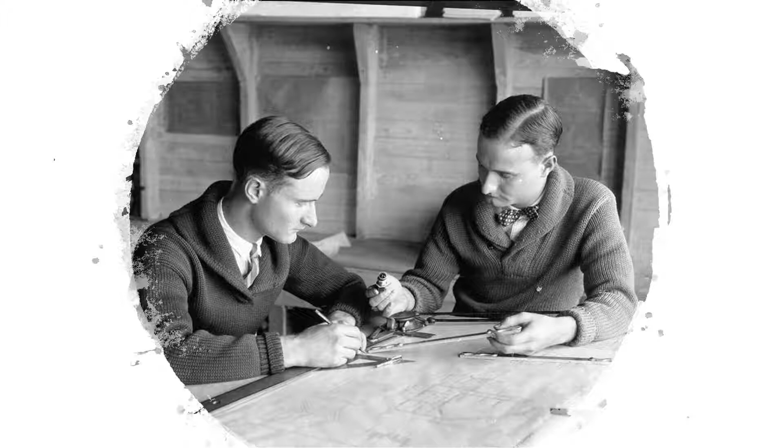I've been around technology and the transportation industry for quite a long time, not as long as these two guys in this picture, but I've seen technology make a lot of changes since the late 80s. Not only has the technology changed, but the makeup of our engineering teams has changed as well. But one thing that has not changed in the past 75 years is this need for collaboration. Whether you're building a road, a bridge, a Walmart, or as I am right now, building a house, we have to collaborate with one another.

We need to exchange ideas. We need to ask and answer questions. We need to share information with one another.

Now, CAD and design applications in general have done a lot over the years to facilitate collaboration. Let me give you a couple of examples. Let's take reference files, just the ability for different disciplines to work in different files and then reference those together to see how our data fits, whether something is out of place, whether something can actually be built. That functionality is incredibly conducive to collaboration.

OpenRoads has taken that a little bit further with the ability to partition data. For example, you've got a 10-mile corridor and you want to break that up into 2-mile sections, letting Team 1 work on Section A, Team 2 on Section B, and so on. Then, of course, you can reference those all together, cut cross sections, do your visualization, run your quantities. Again, highly conducive to collaboration.

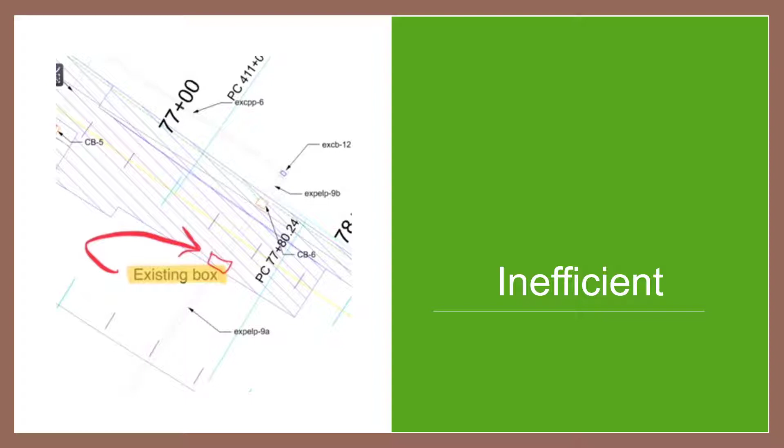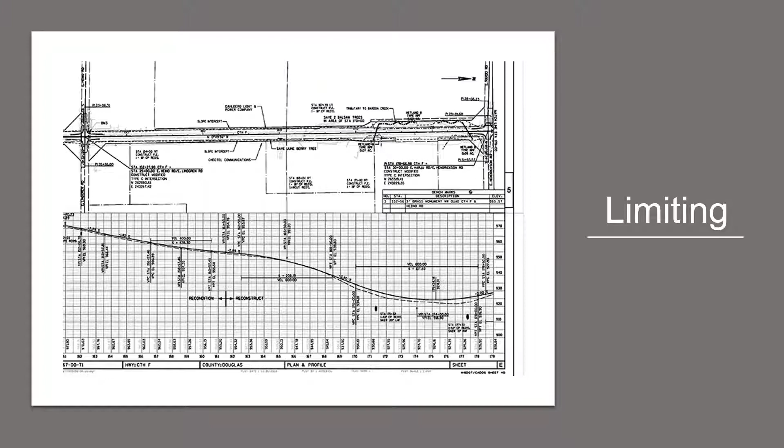Now, we all know this tends to be fairly problematic, and there are some pain points. For example, it's inefficient. The idea that I've got all this data at my hands and I have to create plan sheets just for review purposes is inefficient. At the same time, it's very limiting. When I create a plan sheet or a cross section, it's a snapshot in time. If I'm missing a piece of information, there's nothing I can do - I have to go back to the digital information. So it's very limiting, and of course, it's prone to error.

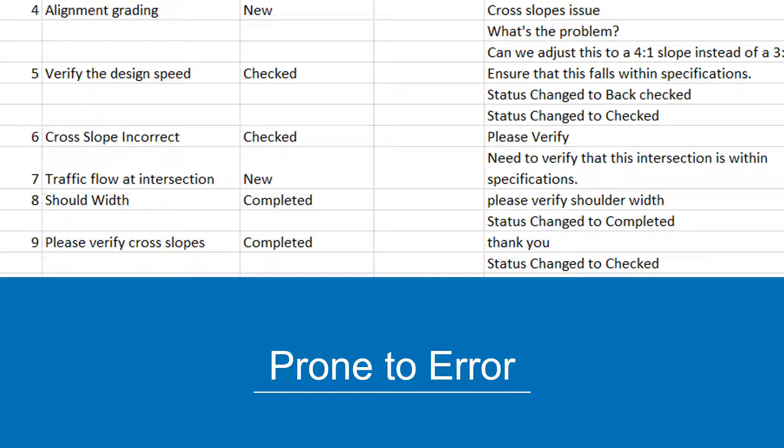Do things get followed up on? If I have an issue, was that issue emailed? Did that person take care of that issue? If I modified a profile, did all the appropriate teams and disciplines get notified correctly? So again, a lot of issues there.

So we haven't made a whole lot of progress, and there's different reasons for why. Part of it is just because it's what we've always done, and change is of course hard. But there are legitimate issues.

For example, let's say I'm a reviewer. I may not be familiar with your project, where it is, or how it's broken up or federated. So without paper, how do I find the right information? How do I know the information I have is the latest and greatest? You may be asking me to do a digital review, but I may not be a skilled CAD user - how am I going to do that? At the end of the day, I've got a lot of questions about, okay, without paper, how do we collaborate?

Well, the way we're going to solve this problem is the way we solve all problems when it comes to technology - we're going to innovate. On the Bentley side, what we're innovating with is the use of something we call an iTwin. Now, an iTwin by definition is a digital representation of a physical asset, a process, or a system. And to put it simply, for us, it's really a representation of our project.

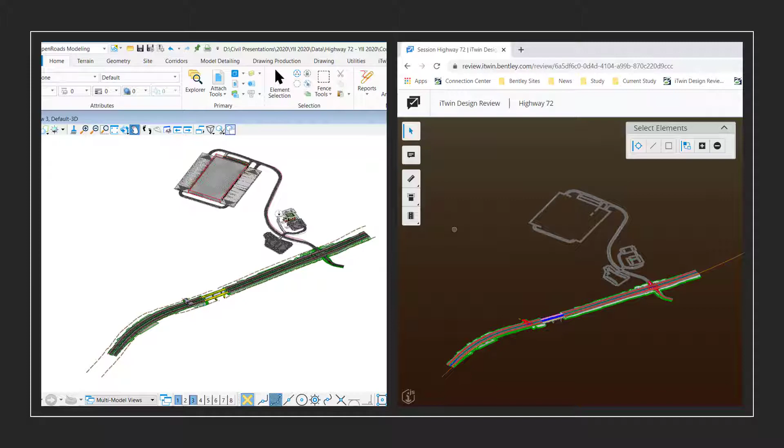I've got utilities, drainage, a site design, and 2 bridges. That's in OpenRoads Designer. Over on the right is my digital twin, or iTwin. Everything there is what I need, but it's not my original data—it's what's called an iTwin.

Let's take a look at how this use of the iTwin would work in a design review process. There are 2 workflows we're going to look at: one called an ad hoc workflow, and the other called a digital twin workflow. There are a few things I want to point out about the ad hoc workflow, and we'll go through each one individually.

It's cloud-based. It provides a quick review of a design work in progress. You can do it from a browser or from inside your design application. You can work in a 2D environment, a 3D environment, or a combination of both. And it's purpose-built for doing the types of reviews you need to do. Let's take a look at these individually.

Let's start with the fact that it's cloud-based. Why is that important? Because we need our information to be available to anyone at any time. We may not all be in the same office. We may not be in the same city or the same country. We need this data accessible to all of us.

Let's take a look at how this works. Here I am in my connection center, and I've got a series of connected projects that I am a member of. I'm going to select this Highway 72, which is my project. There are all my team members from my organization, but notice I can also invite people from external organizations. So we don't all have to be within the same company or the same agency. Now, within this connected project, I have something called iModels or iTwins that I've created.

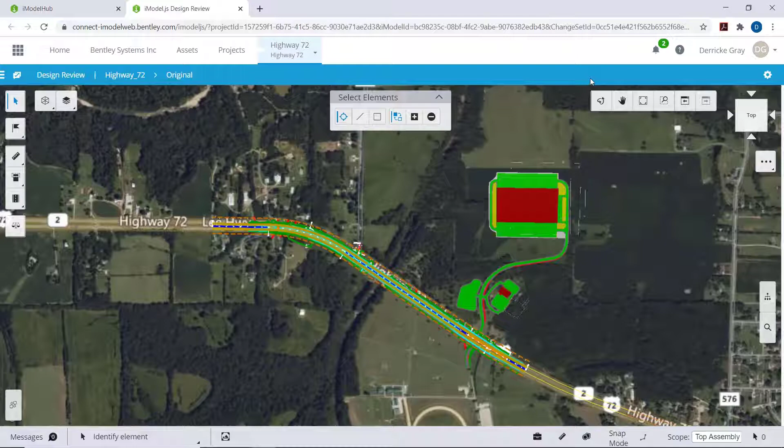I'm going to pop in here and take a look at one of them very quickly. But the point is that this is available to everybody. It's in the cloud, it's web-based. I can always know I've got the latest version, and everybody has access to this iTwin or this particular iModel. Now, what is this ad hoc workflow set up for?

If I need to do a quick review of a design work in progress, I don't want to have to go out and produce plans or produce artifacts of any kind, to be quite honest. I just want to be able to initiate reviews directly from my design application. And this is exactly what we can do.

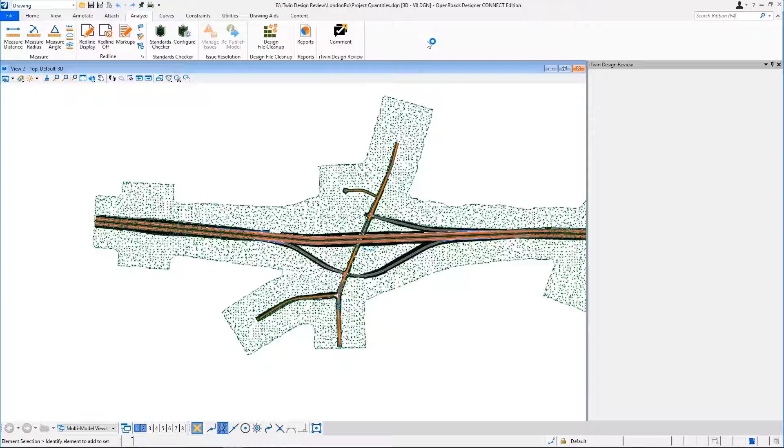Here I am inside of OpenRoads Designer. I've got a project here, and I'm going to click my comment icon. What it's going to do is kick off iTwin Design Review from directly inside of OpenRoads Designer. Now, I can access a previously created session, or I can create a new one.

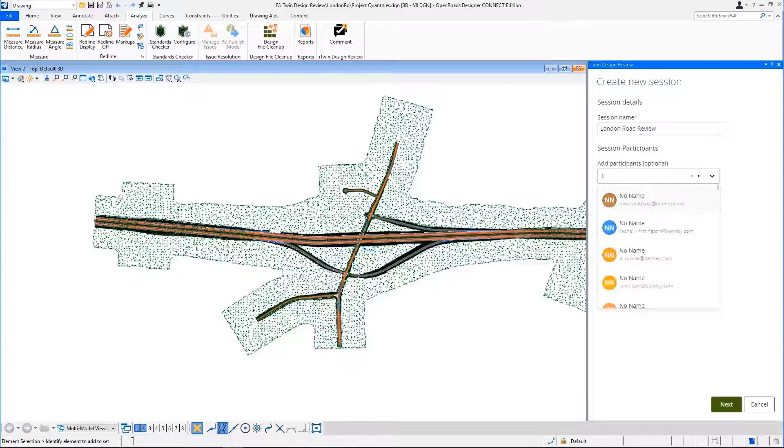Let's say, for example, my project manager says to me, 'I'd like to take a look at your project and see where you are and review a few things.' So I'm going to create a new session called London Road Review. I'm going to add Taylor Gilmore, who is my project manager, and create a session. You can see it's out there and ready to go.

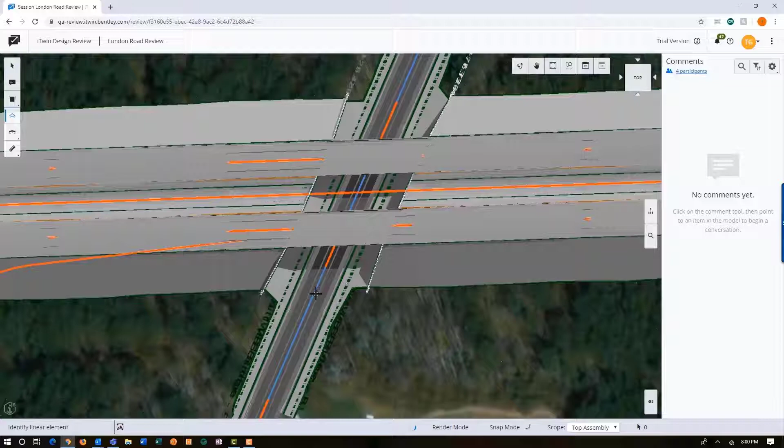Now, when I added Taylor to my session, it automatically generated him an email saying, 'Hey Taylor, you've been invited to this London Road review.' He can access that directly from his email, or he can directly access it, as you see here, from a browser. So we've all got access to this information.

Now let's talk a little bit about the browser or in-app access. As you just saw, I kicked off the session from inside the application. Taylor actually accessed it from a browser. The idea is you can collaborate without needing to install any additional software. If you've got OpenRoads Designer or MicroStation and want to use those, that's great. If you don't have them, or just want to use a browser, you can access it through a browser.

So let's go back to Taylor. Here's Taylor—he gets my email, clicks on the link in the email, and it opens him up in a review session in his browser.

Now, inside this browser, he's got access to a lot of different types of information, and we'll go into this in detail in a little bit. One of the things he has access to is my profile, so he can look at a profile in a particular area.

Let's say Taylor has a concern that we're in a sag curve underneath this overpass, so he wants to create a comment. He'll call it a drainage issue and set the discipline. Notice he's going to say 'at Derricke' and say, hey Derricke, I need you to look at this drainage under the bridge. It's a concern, right? So he's added a comment to this ad hoc review session.

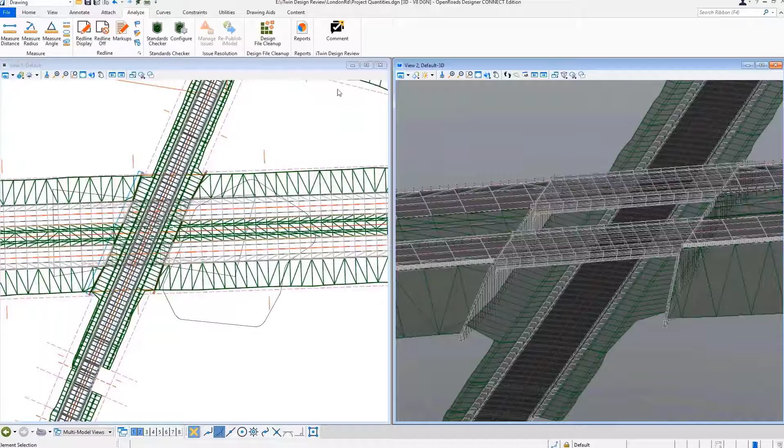When he does, it generates an email to me and lets me know he's mentioned me in a comment. So let's say I'm over here, maybe on the other side of the building, could be a different city or country. I'm working and my email pops up and says, hey, you got a comment. I wonder what Taylor is doing. So I go back into my in-app design review and say, let me go see what he's talking about. I open the last session, I can see his comment right there, and I click on it.

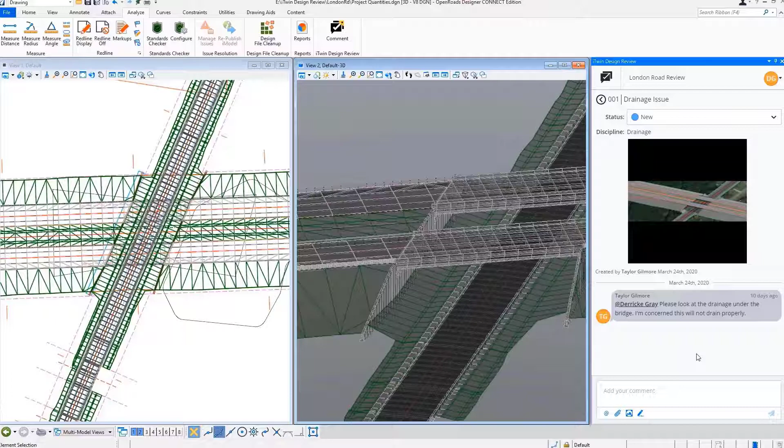He's got a picture right there of the area, and I can look at his comment. Now the nice thing is I'm in my design application, so I can literally go in here and check it out and say, I wonder, is he right, or do I need to make a change?

So I'm going to select that alignment and open a profile. You can see here I've actually got my bridge superimposed on my profile so I can see exactly where it is, and I can say, you know what, he's right. I've got a sag curve there. I'm going to have to deal with the water underneath that overpass.

So at this point I'm going to come back in and use @Taylor and send a comment saying, you're right, I reviewed it, I'll get with the drainage engineer, we'll figure out a way to handle that water, and I'll get back with you a little bit later.

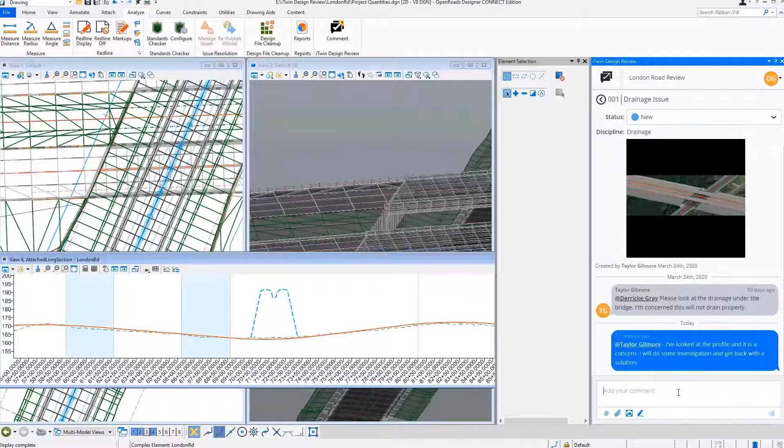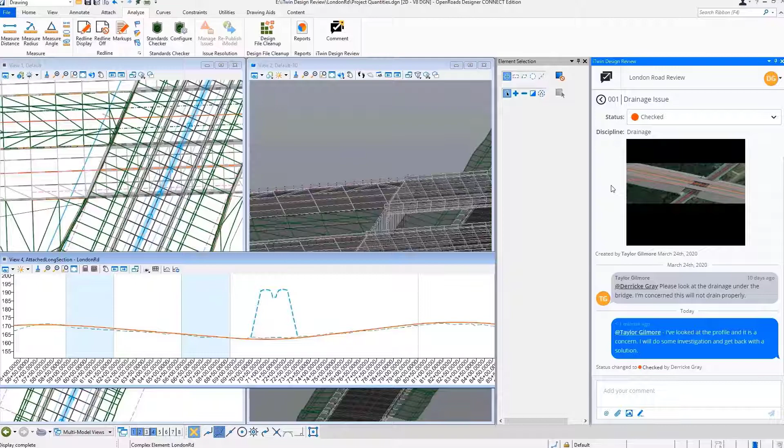Now notice when he created the comment, the status was set to new. I'm going to go in and change that status to checked. I'm not going to close it out yet, but I want him to know I did go in and check that. You can see how the process works: somebody may check it, somebody may verify it, somebody may close it out. The idea is we've got an ongoing session, nothing's falling through the cracks, and our comments are getting recorded.

All right, let's talk a little bit about 2D and 3D environments. A lot of times when we think about models and design review, we think about 3D, and that's perfectly legitimate. But we don't want to forget it's also 2D. So when you create an iTwin, it can have just 2D data only, just 3D data only, or any combination of both.

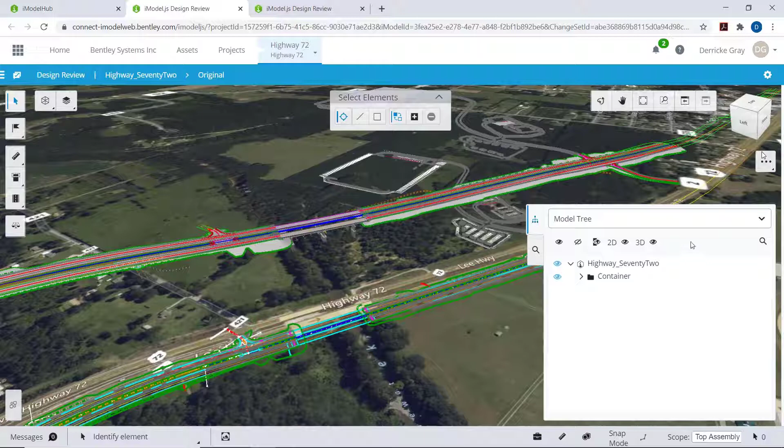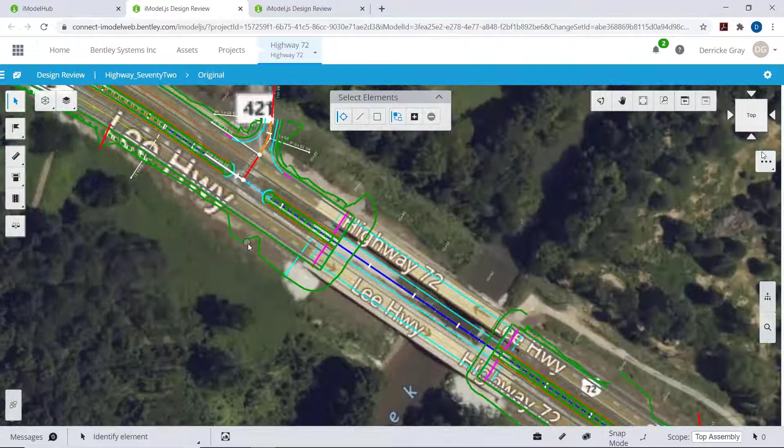The nice thing about design review is it allows me to quickly and easily turn off one or the other, based on whether it's 2D or 3D. So here I've turned off my 3D, and I may want to do some work in 2D, like measure a distance or an area, or calculate a station and offset. So I can identify the alignment and say, I wonder what the station and offset of that head wall is right there.

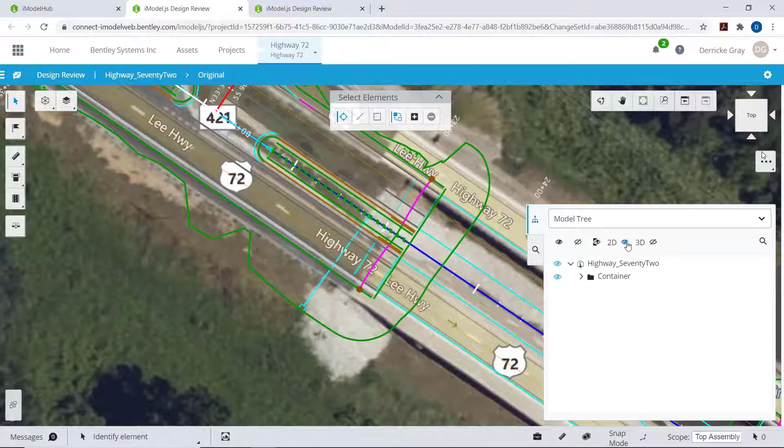Or I may want to come in here and look at the properties for this culvert, getting the inverts, the start and stop invert, as well as the size of that culvert. Or maybe I want to cut a cross section. So what I'll do is turn off the 2D and turn on the 3D.

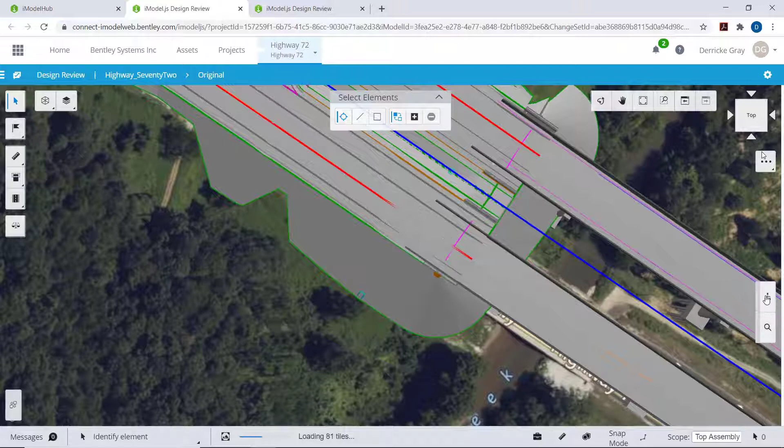Now notice with the 3D I have to zoom out a little bit because it's up top at the proper elevation. So here I am in 3D, so I'm going to come in here and go to my reality data and turn off my aerial. And maybe I want to look at something here. Maybe I can see it better if I go to a wireframe mode, and maybe I want to look at it from there. Maybe I want to come over and cut it.

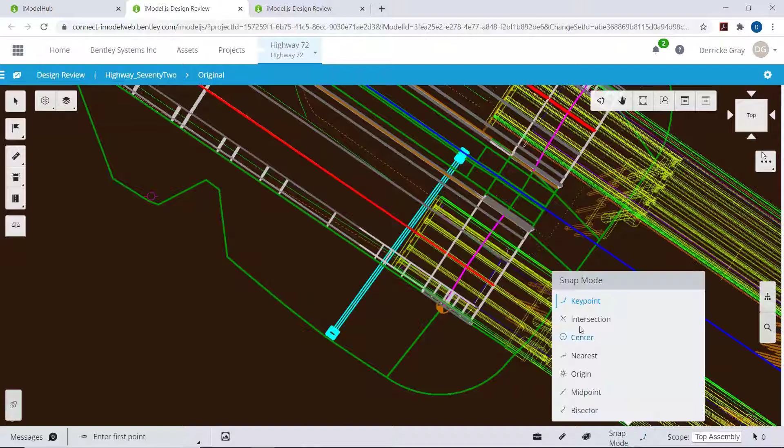I want to do a cross section, okay? And so I'm going to turn on my snap mode here, and I'm just going to come in here and snap to the end of that head wall there. And then I'm just going to move up and snap to the other end of that as well. And then I want to cut a cross section. So just by putting a data point, it automatically cuts my cross section, and I can see the two structures as well as that crossing culvert there as well.

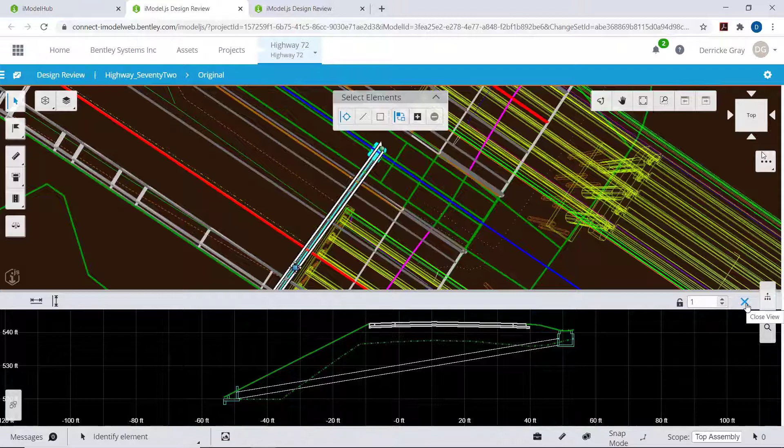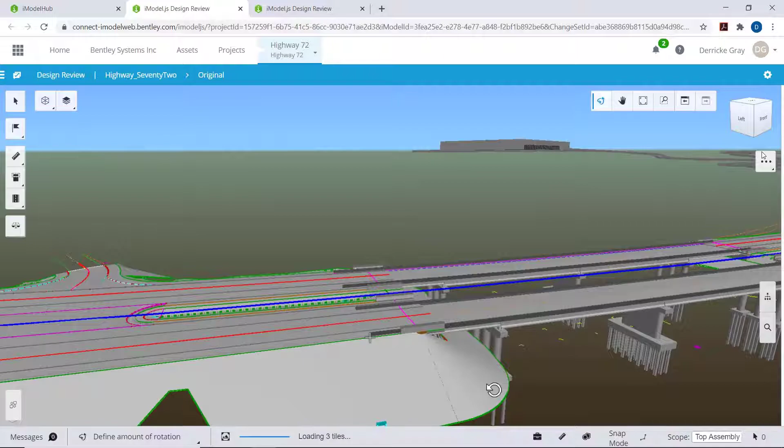Or maybe I just want to navigate around and have a little fun in 3D and look at it in a different perspective. So again, I can just rotate that up. I can look at that culvert from underneath and see how all that fits and works. And again, a lot of flexibility here that we have because we can work in both views.

The other thing about design review and the ad hoc workflow is that it's purpose built. We understand when you're doing civil reviews that there's certain types of things that you need access to, certain types of things that you need to do, and design review tools give that to you. So let's take a look here. Notice one of the things you have access to is your existing file structure. So even though this is an iTwin, I can still go in and turn off model data from different disciplines.

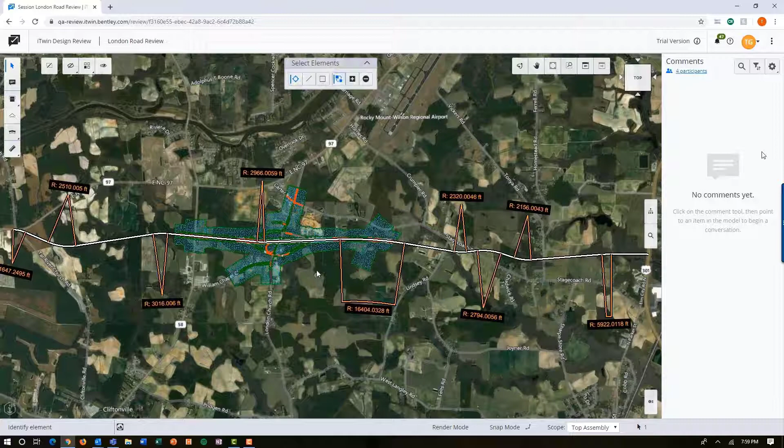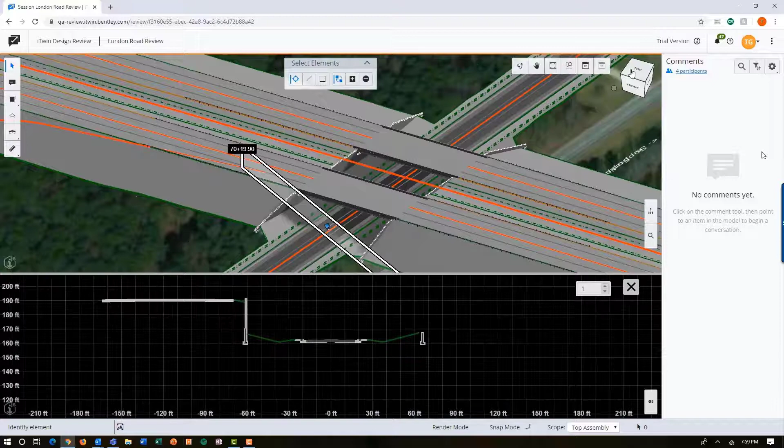I can go in and select an alignment, for example, and get data on that alignment. I can get graphical data. I can go over to the properties window and see different information about it inside the properties window. I may want to do some other things. Let's say, for example, we've already seen the cross section, 2 points. Let's look at a cross section perpendicular. So I can select an alignment and say I want to cut a cross section perpendicular at that particular alignment, and it does that for me.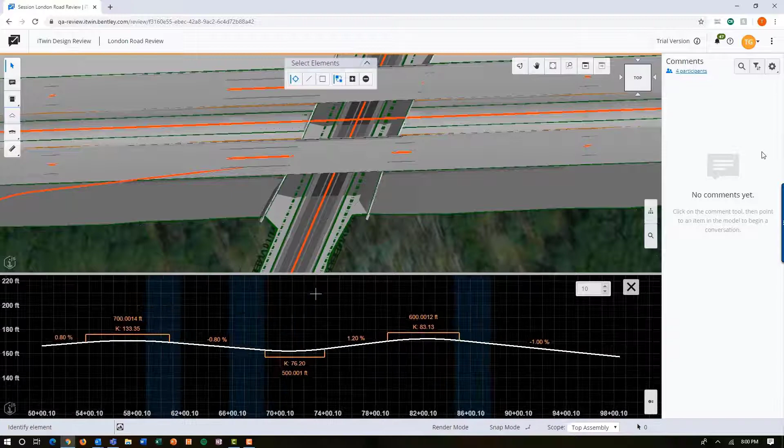I may want to come in here and move that, and this is key because we're not showing you cross sections that came over from ORD. We're cutting these on the fly from a browser. And so here I've just gone to another area. Maybe I want to measure some distances in my cross section. So you can measure in the plan view, or you can measure in the cross section view. Notice it's giving me the runs and rises. It's giving me the slopes. It's giving me other information about that on the fly. We can also, as we saw earlier, look at profiles for any piece of geometry that we have as well. So again, a lot of information here that it's given us that as civil engineers we need.

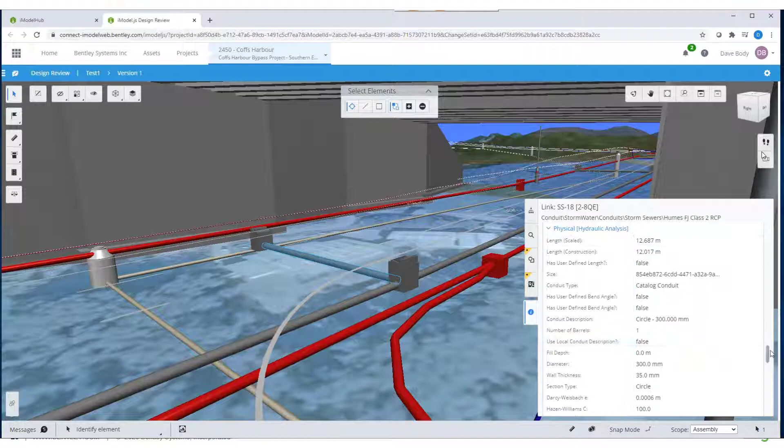Another thing it does is give us access to business information. So for example, here's a pipe, and I can just select that pipe, and all of the engineering content for that pipe comes over as data. So you can see it's just a preponderance of information there about your pipes, your inlets. A lot of this is automatically populated just because it's contained within the engineering data, but you can also add your own customized data and have those come over to the iTwin as well.

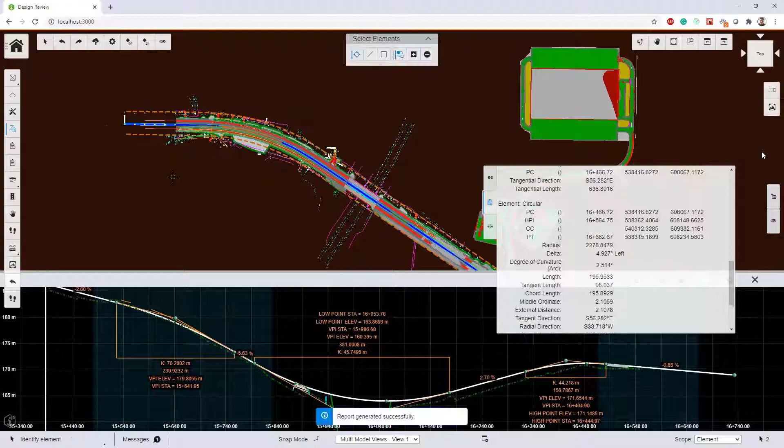Finally, we've just added a couple of new things, the ability to do reports off the iTwin as well. So notice here I can select alignment. I can get a vertical alignment or vertical geometry report from that alignment. I can come back over here. I can do a horizontal alignment report. So I'm just going to select that alignment again, and it's going to generate a horizontal alignment review report.

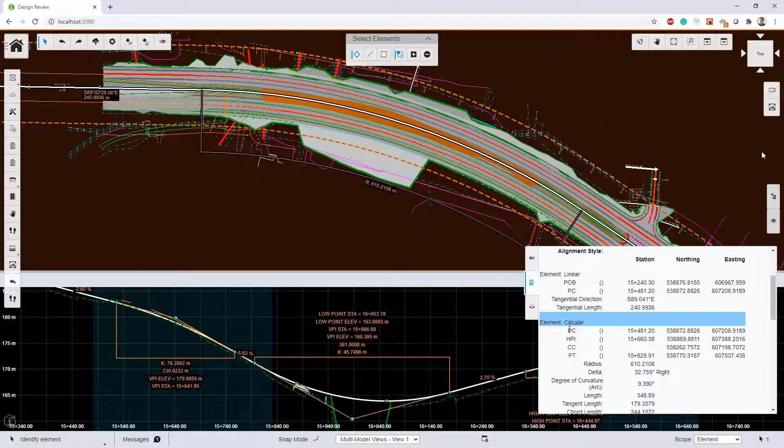One of the neat things about this is that you can actually select an element in the report. For example, you can select a circular curve or a tangential element, and it'll actually zoom to that location in the iTwin and show it to you.

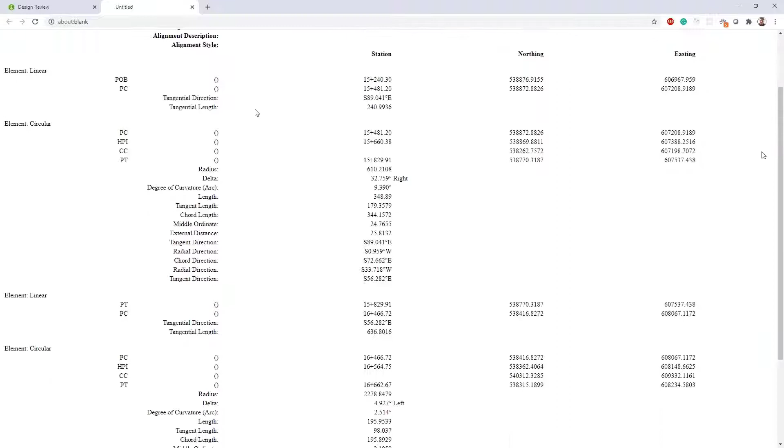You can open this in a new tab in your browser, and so from here you could take this out, of course, to other formats and stuff as well.

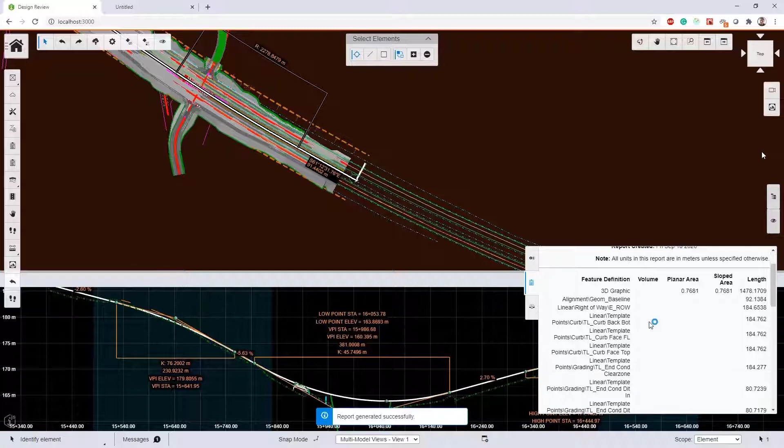Another thing that we allow you to do now is to calculate quantity reports. So you've got different types of options. I'm just going to do from a polygon. So I can actually come out here and say, hey, I'm just going to put a shape out here, and everything within that shape, I want you to calculate the quantities for me. And so you can get a quantity report by area. Again, this is coming directly from the iTwin. And as we saw with the geometry reports, you can open these up in a different browser as well.

Now, that is the ad hoc workflow. There's a second workflow called the digital twin workflow. Now, the digital twin, remember the ad hoc, you get all of that stuff, but it's really about these one-offs, right? You get all of that with digital twin. The difference with digital twin is really two things. Number one, it's more geared toward a project level design review. And the main thing that's really different with it is you get an accountable record of who changed what and when. So let's talk about that accountable record.

So what it allows us to do, you don't think of the iTwin as a single snapshot in time. It's an updatable database that we can continue to add to. And what it allows us to do is create named versions and track who changed what and when, and then we can do different things with that information. So let me give an example of how this works in another way.

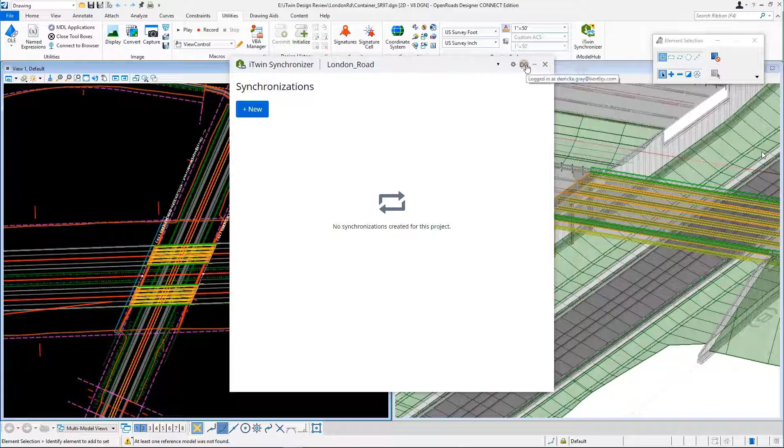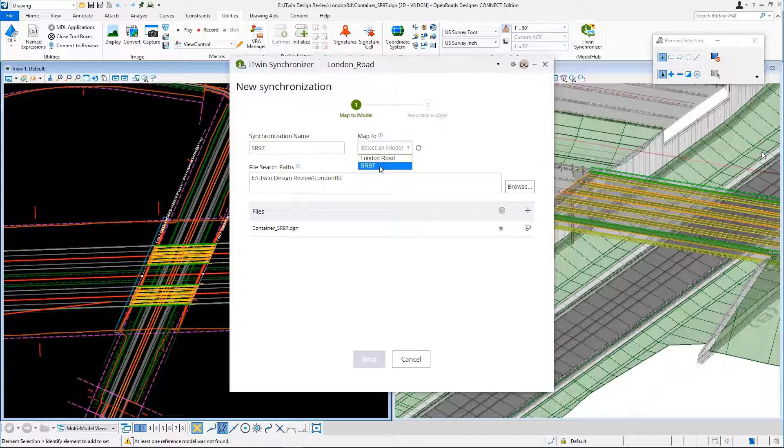So here I've got a project. I'm going to go open up something called iTwin Synchronizer. iTwin Synchronizer allows me to create an iTwin up in the cloud in what's called the iModel Hub. Because I'm already logged in as Derricke Gray, it knows what projects I have access to, and so it lists them. And so I'm going to choose a project, and I'm going to create a new synchronization. In my case, it's called State Road 97. And I'm going to link that or map that to an iModel that I previously created up in the cloud.

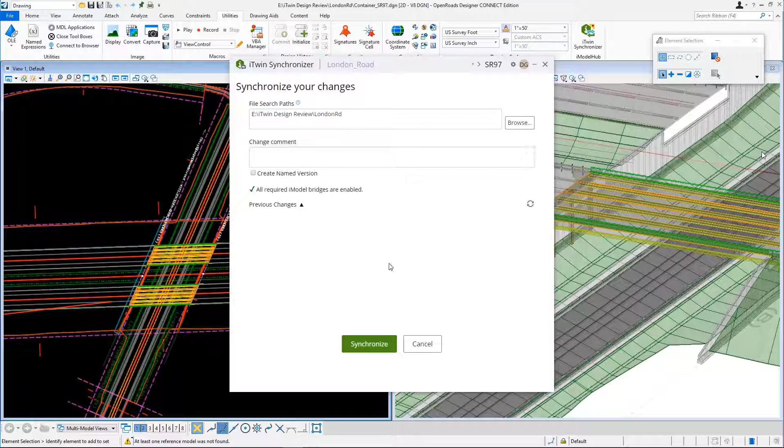And what it does, it's going to go out, make sure everything's ready to go, and it's going to create a synchronization. Now, the nice thing about this synchronization is once you've created it, it stays with the project. So it'll always be available to me. Anytime I want to push changes, I just click on that synchronization button. And so I can add comments. So this is the original iModel that I'm creating. So I'm just going to go ahead and say synchronize.

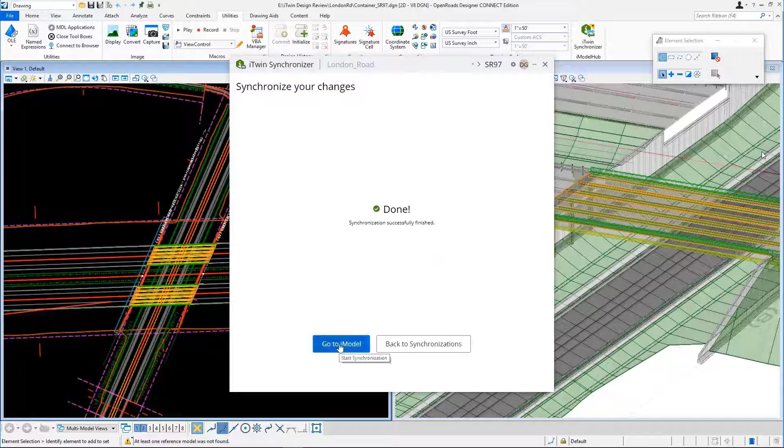Now what it's doing is it's taking all of my reference files, my bridges, my utilities, my drainage, my site, my road, all of that. It's correlating into a single iModel or a single iTwin. Once I'm done, I can say go to the iModel, and it'll take me out to my iModelHub. And then I can say, okay, well, let's go view this iModel, right? And we can go in and we can review the iModel and take a look at it.

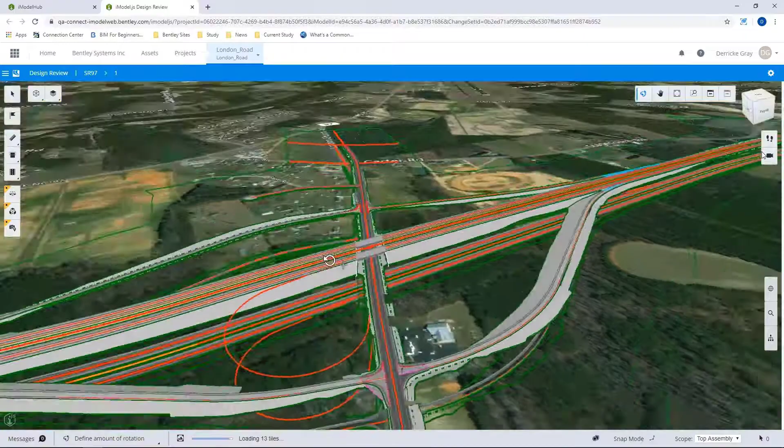And so here we go, and it's bringing it up. And notice it says you've got the latest version. I'll just say enter the iModel, and it allows me to look at it. And there it goes, right? So again, that's another way to create the iModel, which has this synchronization so that anytime I want to, I can go update the iModel. So let me show you. So here's the iModel, right?

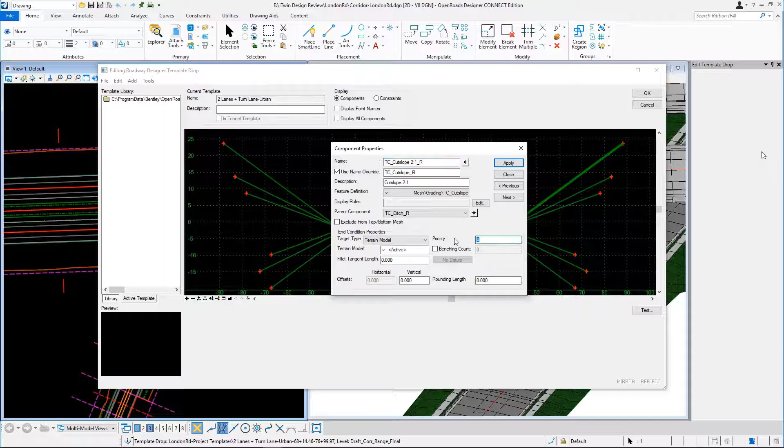So let's say I'm in the iModel and I've got a little issue right there. You can kind of see my cut slope is coming up into my abutment right there, and so let's say I want to change that, right? So I'm going to go back to OpenRoads Designer. And of course, in OpenRoads Designer, it looks exactly the same as it should. I'm going to make a change. So I'm just going to change this cut slope, I'm going to let it reprocess my corridor, and you'll see my 3D model updates on the fly right now. I've made the change. Now I want to push that to the iModel.

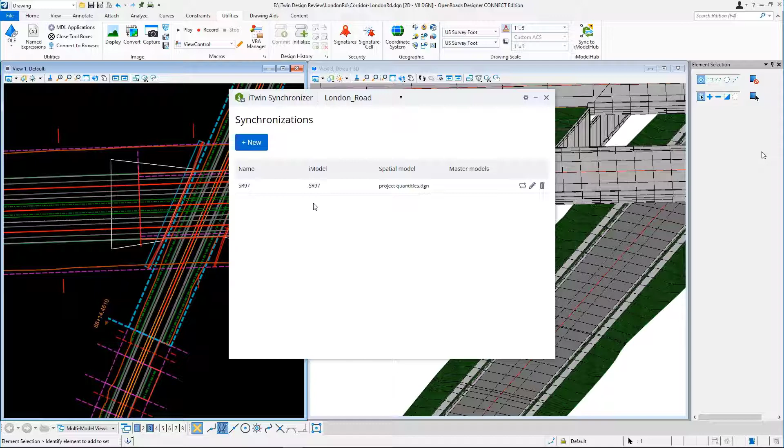All right, so I just go back to my project here, London Road. And what I'm going to do, it remembers the synchronization. All I got to do is push the button. And what it'll do is it'll take that change that I made and it'll push it up to the iModel. And I can put in a comment, side slope change. And it creates what's called a named version.

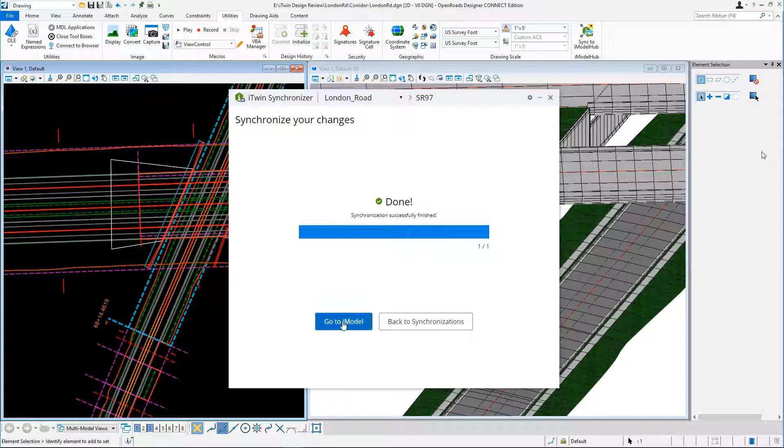And so it keeps a track record, if you will, of who changed what, what they did, and when they did it. So I'm going to say, okay, well, let's go back to the iModel, and you can see there's my change record right there. And of course, I can go in and view the iModel, and we'll see that the iModel has been updated with the new changes. Okay, so that's what's different about the iTwin design. It actually allows you to create this.

This ongoing record. The final thing about this is the iTwin design review workflow is really set up to do project level design reviews, where the ad hoc is more kind of a one-off. I want to kind of collaborate with my team or whatever. There comes a point where you're ready to do a project level design review, right? And you want to collaborate among disciplines. This is really what this is about.

So let's go back in and take a look at some of the things. Now, as I mentioned earlier, and I think this is important, it maintains your file structure. So for example, my base map is all of my site data. I can turn that off and on, right? And what this allows me to do is create saved views for different disciplines.

So for example, I could come in here and create one just for the site design, and it would just have the site design on. Or I could go in and say I just want to create one for the 3D bridge, and it would create one. So again, we can set this up so every discipline has access to their own information. And then of course the power here is this ability for everybody to comment.

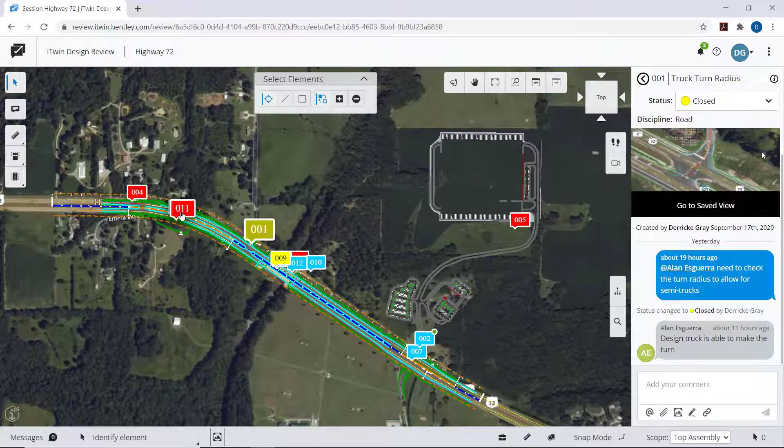So you can see here we've got a review going on. We've got different things. I can click on a comment. There's the comment. If I want to go to the view where that comment was saved, I can just say go to saved view, and there it is. I can also go the other way. I can click on the little number in the view, and it'll take me to the appropriate comment over there.

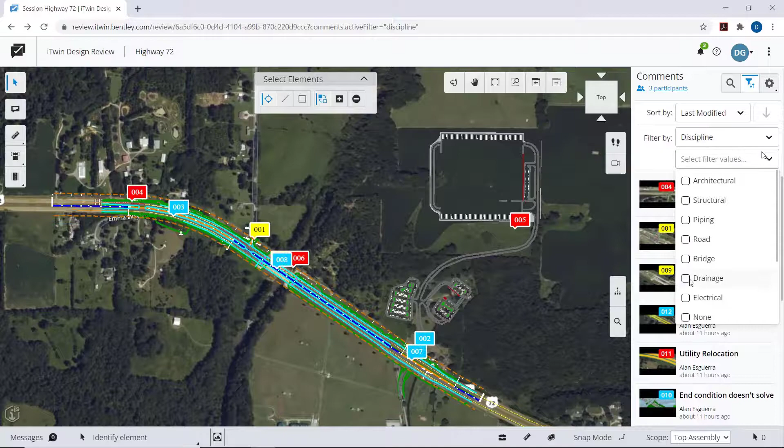Notice that you can filter by status, for example. So I can say, well, show me all the ones that are closed, right? And it'll show me both graphically and in my list. I can filter on discipline and say, well, show me all the drainage issues. And it'll show me the drainage issues, the ones that are assigned to that particular discipline. Or I can say, show me all the bridge issues, and it'll show me the bridge issues, and I can go in there.

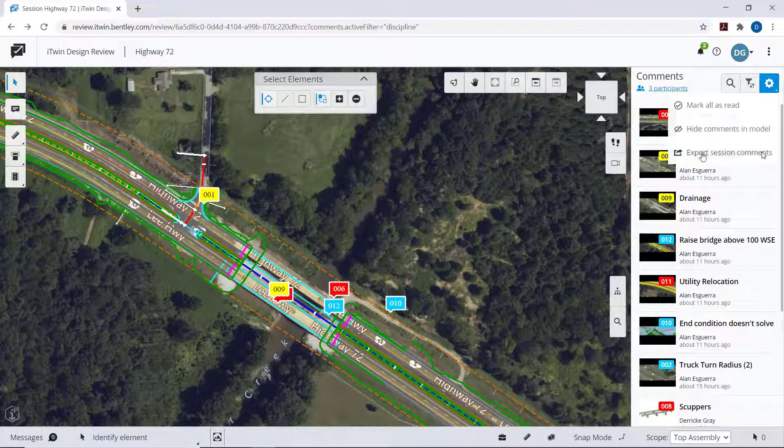Again, this is all customizable. The status, you can set them up according to how your organization works. You can change that, and then of course notice how it changes the color over in the graphics. The nice thing is everything that's done is being tracked and can be exported out to a spreadsheet at any time. So it's going to remember who did what, when they did it, what the message was, when the status was changed. So it creates this kind of a record of what we've been doing.

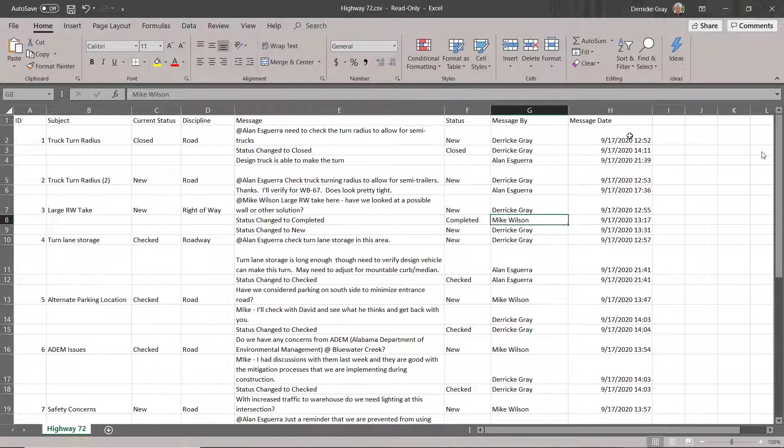Now, I don't know if this is the new normal, but the point is this: whether you decide that you want to move to digital collaboration even when you're back in the office, or you want to be able to move to digital collaboration because we've got these federated teams working at home, whatever the reason, whatever the timeline, I hope this presentation shows you that OpenRoads can get you there. With that, thank you for joining, and have a great day.